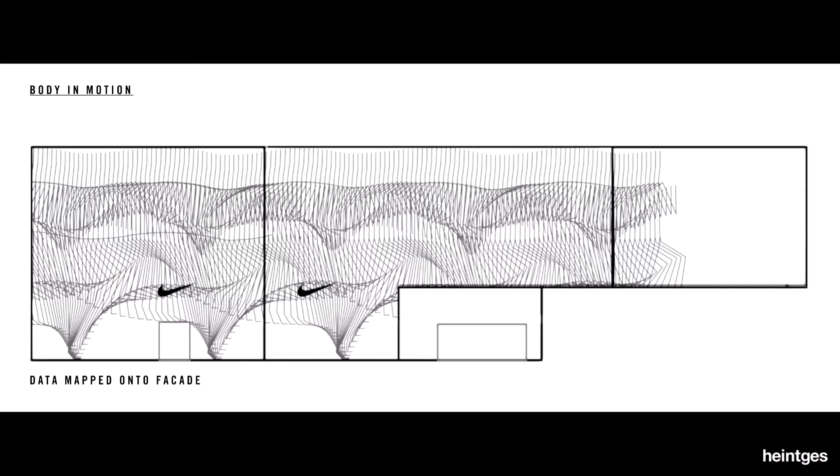The designers wanted the facade to be more dynamic than just a flat image. They wanted glass to provide transparency, limited and distorted transparency to the store experience within, but they wanted the facade to be activated. They aimed not to just represent, but to embody motion. The idea was how to do this with the glass. So we know that glass can be molded and shaped into many forms. There's lots of architectural examples of curved and textured glass that were looked to as precedents.

And from that developed Nike's intent. They wanted to create a lenticular view through the glass with constantly shifting reflections, refractions of light, a tight membrane vibrating with energy as people move around, through, and inside the facade.

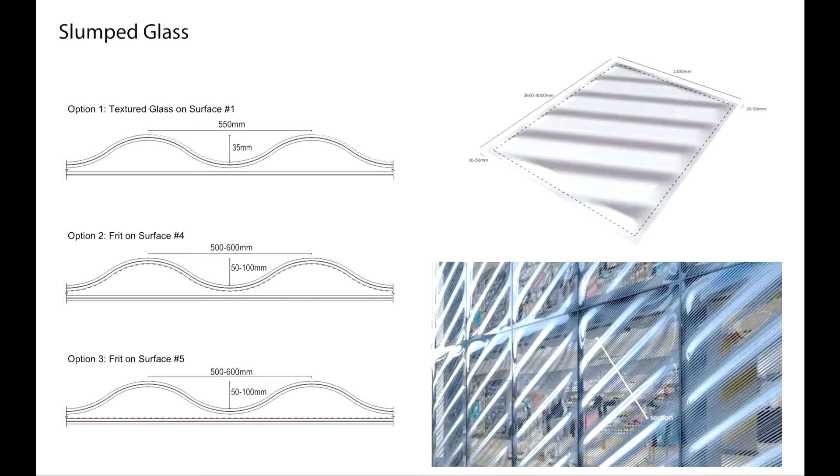So there were 2 scales of patterns on this facade. The double curved geometry of the slumped waves, which tapered to a flat perimeter, was discussed as the macro pattern. This was enhanced by a micro pattern of lines, providing a finer grain of texture on the surface of the facade. The inner light would be flat to allow for low-E coating, but also for the application of graphics behind in the future. And as this got started, the idea of translating this onto a facade in a building presented a number of challenges.

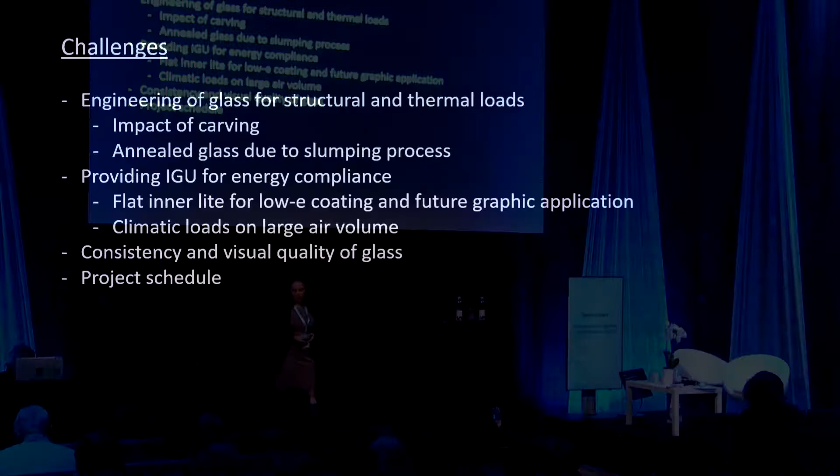So it wasn't a stretch to think that the glass could be physically made into this shape, but to implement it on a facade, to feel comfortable with the engineering and everything, and to have someone sign off on it was more of a challenge. Some of those challenges included lack of established rules for engineering glass with the surface disruptions, as well as the use of annealed glass necessary from the slumping process, which would be more vulnerable to breakage from thermal stresses.

The flat inner light expanded options for the low-E coating, and as mentioned, for graphic application, but it meant a larger volume of air between the lights, which would increase climatic loads, which I think I heard a couple other presentations talking about today. As the air expands and contracts throughout the year, that larger volume of air can create issues. In addition, there were the typical issues of consistency, visual quality of the glass. And then we had the schedule. So this all had to be accomplished on an accelerated retail project schedule.

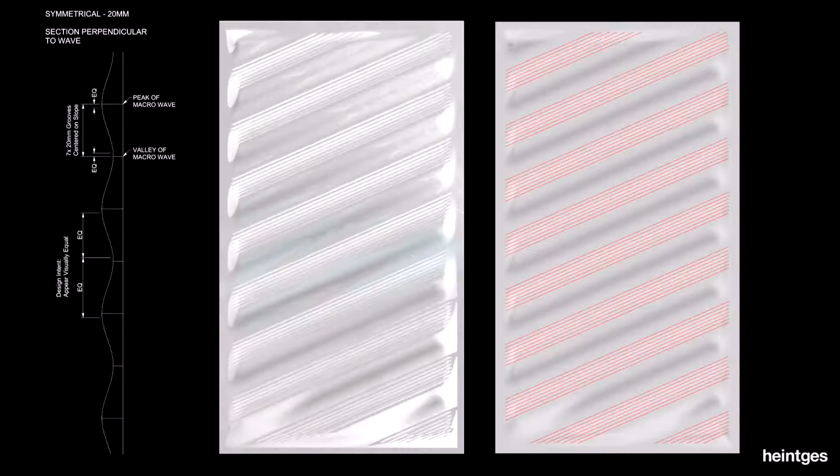So we got started. The engineering analysis started with geometry from the design team. See here. Heintges used that 3D geometry for preliminary engineering of the slumped glass, checking for stress and deflection to confirm the viability of the architectural design. We looked at different reductions in thickness, different assumptions for the areas where the glass was to be carved.

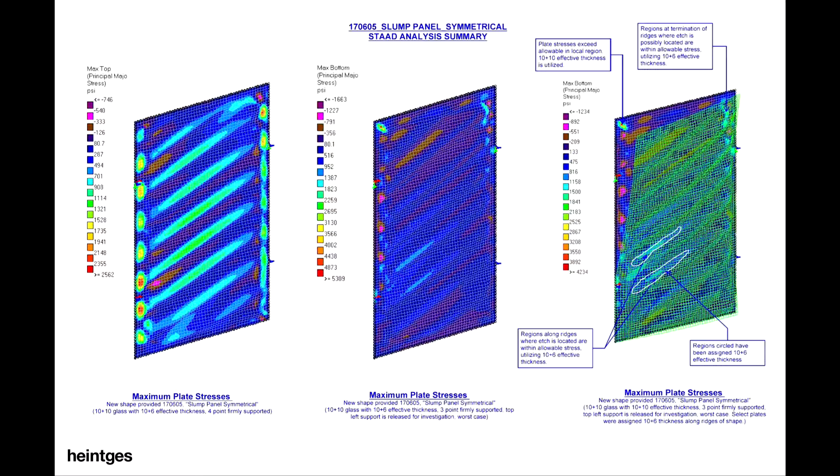We also looked at thermal stress on the glass, with the worst case being a hot differential temperature between the center and edge of the glass in the summer. And then evaluated as well the IGU performance under the climatic loads. We calculated equivalent thickness of monolithic glass that would have the same stiffness as this very stiff laminated outer light.

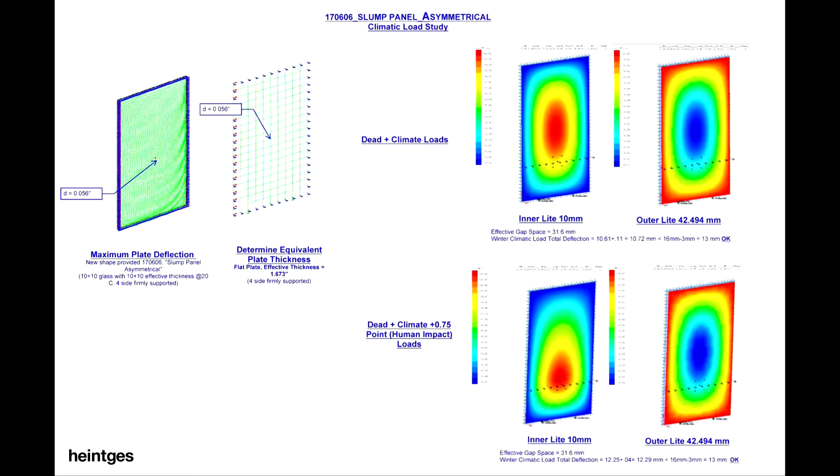Approximately 1.7 inches equivalent of glass was used to check the deflection under climatic loads of the inner light, which being much thinner would do most of the deflection. We wanted to make sure that the stress on the edge seal was okay, and also that the two lights wouldn't touch under any of the expected conditions, including when you incorporate all the glass tolerances.

So as these engineering analyses were continuing, once we showed feasibility, we knew with the schedule that it was important to bring on glass fabricators early. And so at this point, Cricursa was contracted to join the research and development, starting with a selection of samples to look at how to create the micro pattern and how the macro pattern could be joined with that to get the desired effect.

So Cricursa, in their factory in Barcelona, began working on a number of trials. This is a view of the micro pattern, which was created by carving shallow grooves on the #1 surface of the glass, carving and polishing with a CNC machine. And then this is one of the first photographs we saw of a small size sample of this first prototype where that carved glass was then gravity slumped on a mold to create the waves and come down to the flat border at the perimeter.

I think when this photo was sent, these initial samples were reviewed through photographs and conference calls. Everyone kind of let go of the breath they'd been holding and thought, okay, it can happen. We can make this project. It began to feel real, but of course there was a lot more to do.

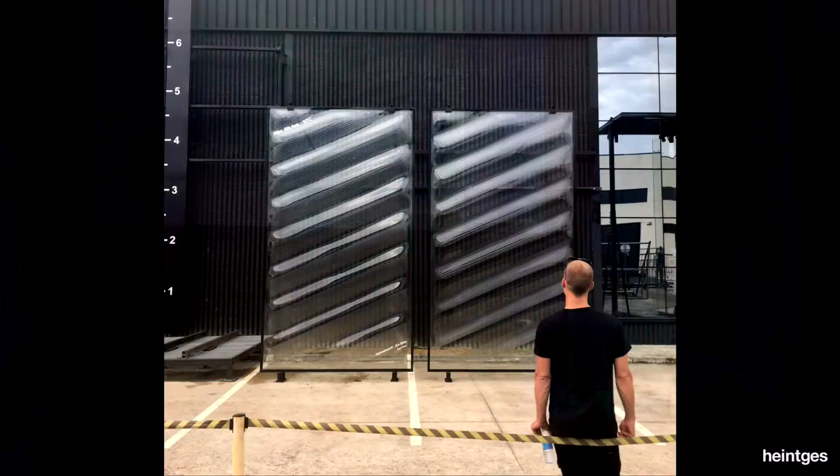And then we moved on to the next round of visual mock-ups, which was full-size, project-size IGUs that were reviewed at Cricursa's plant by the design team to make the final decisions about the pattern and location of the microtexture, as well as the slump shape. The outer light, at this point, we settled in on the glass makeup. It's 10 plus 10. The outer light is carved, as I mentioned, with about 1 millimeter deep grooves, and they were 20 millimeters wide. And then the inner light is heat strengthened with a low E coating on the #5 surface.

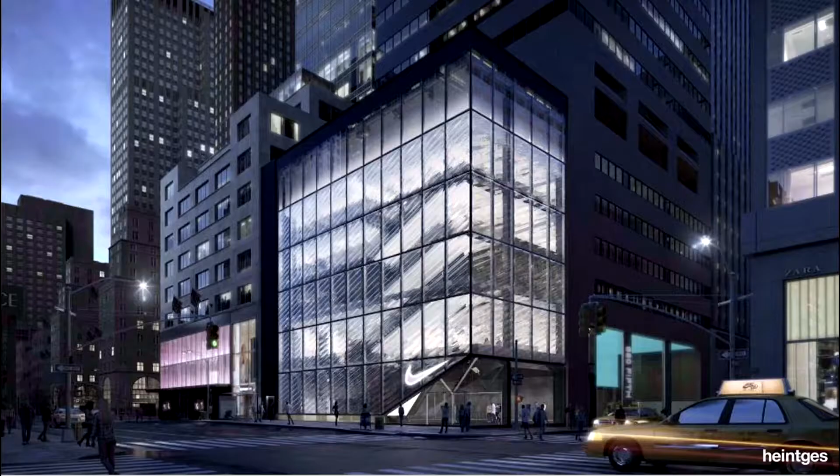From these samples, the final geometry of the glass was determined. Some of this came from the design team's refinements, and some of it came from the fabrication requirements and limitations. So the adjustments in the width of the flat perimeter band, where the edge seal would lie, as well as the height of the slumped waves. And these revisions were then taken back into the analysis and checked again to make sure that the structural acceptability of the glass form was okay. It was acceptable.

So at this point, there was actually a decision made to make uniform the glass sizes, largely for cost and to limit the number of molds required for the glass. You can see here there are 4 atypical lights right there. The rest of them are all typical. But the other thing this did was actually make the facade stand separate from the structure behind, and it divorced the lines of the facade grid from the floor levels behind.

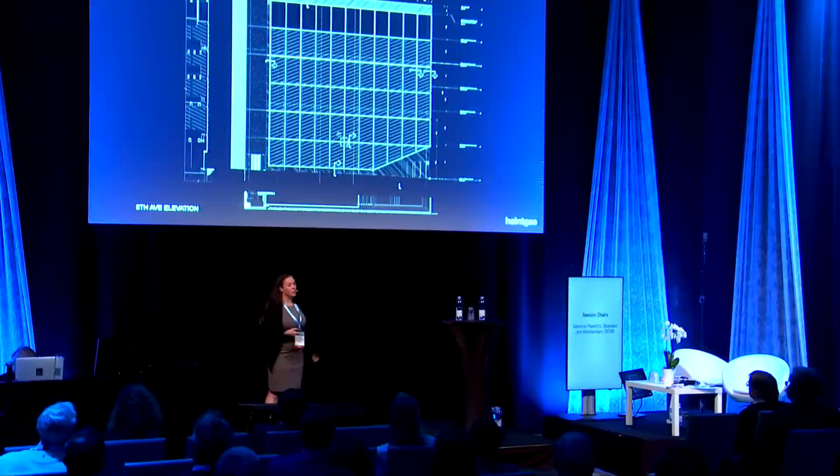It was at this point, with this design finalized, CLA was brought on as the facade contractor, and along with Larson Engineering, they were the final engineers for the full facade system. So here, in this image of the facade, the structure was steel framing, mullions and transoms that were hung from the roof up here. Coming down, they were connected laterally at the 1st, 2nd, 3rd, and 5th floors.

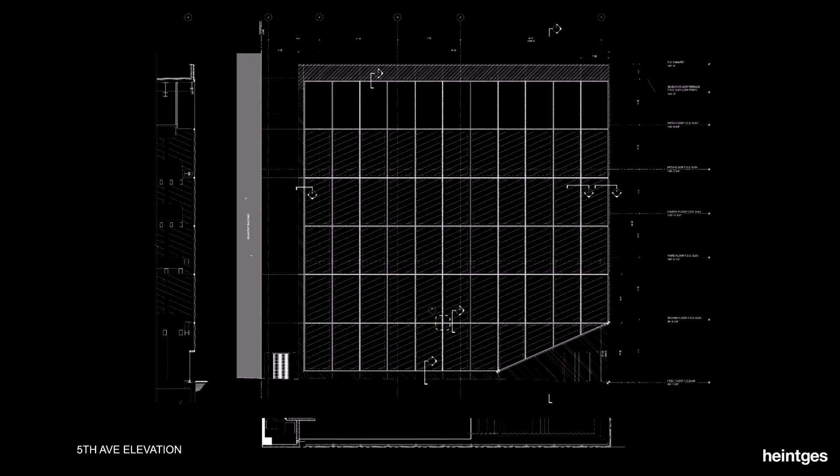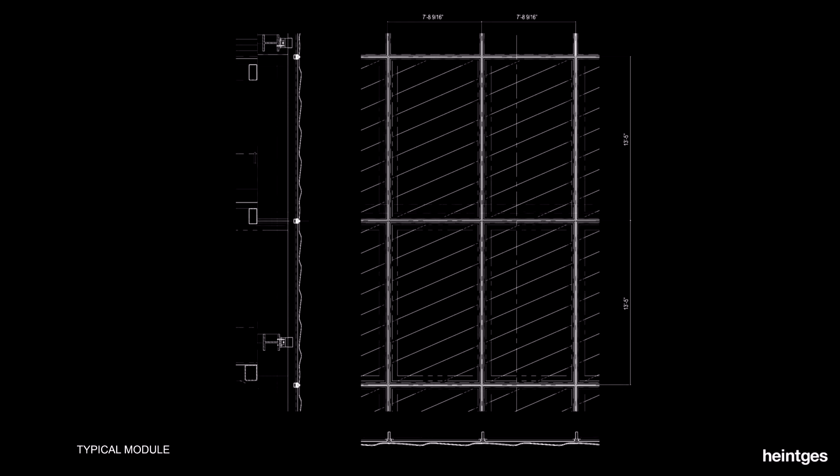And there's the entranceway, as I mentioned before, which has the 4 unique lights of glass. Here you can see the glass units are about 2.4 by 4.1 meters. And the wave pattern angle is 23.5 degrees, which is the same angle as the Nike swoosh. And also, the spacing was designed to allow that angle and to continue the lines across the entire facade between panels.

The glass was pre-glazed. You can see here the design, pretty simple, pre-glazed to aluminum glazing adapters, and then with a toggle system designed by CLA attached back to the steel framing.

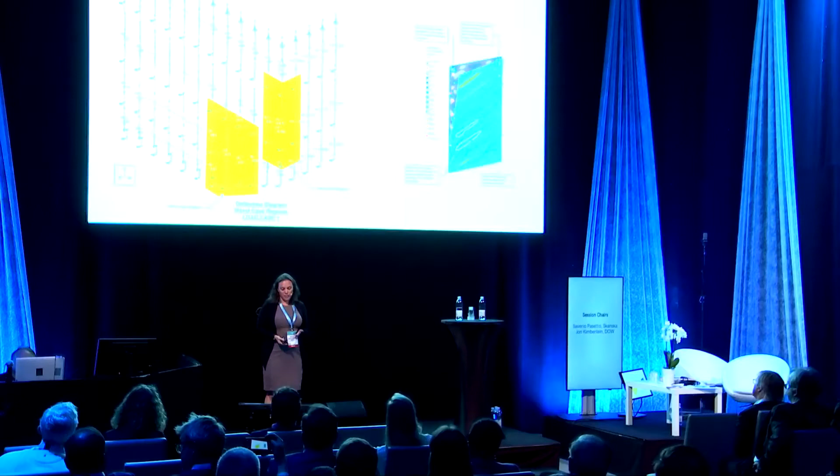And this development of the facade system provided information that was fed back into the glass analysis. So here is a deflection analysis of the steel framing. And you can see highlighted in yellow a couple locations where, due to the locations possible for anchoring back to building structure, we had differential deflection.

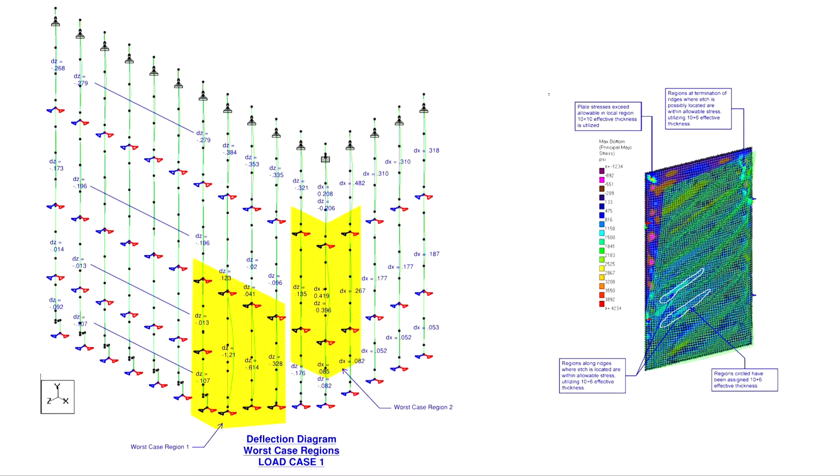And with the glass, we needed to make sure to balance the stiffness of the mullions with the inherent stiffness of this glass, and to make sure that the glass could accommodate the differential deflection of the framing without excessive stresses. You can see some of the analysis here. We had made assumptions, particularly about the etching in the glass during the engineering. And to validate some of that, early on there was material testing done.

4-point bending, EN 1288-3. 360 by 1100 millimeter samples with smooth ground edges. And they were all fired flat in the slumping kiln with the same time, temperature, duration that was expected for the final project, for the laminated glass. And the idea was to test and see how it related to typical flat glass.

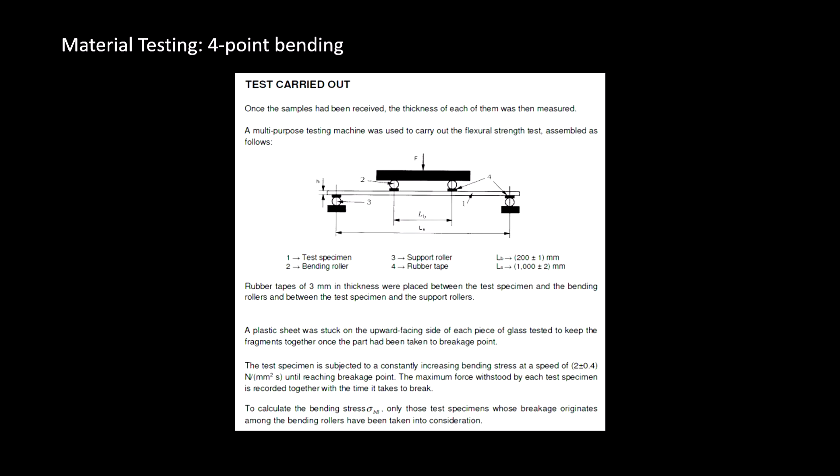And as expected, the carved glass was slightly weakened by the carving, a larger reduction in strength when the carved surface was in tension, but it still performed structurally. And this was encouraging. I think the assumptions that were made during engineering proved to be pretty accurate. But at the same time, in order to feel comfortable, further testing of actual project glass was required.

So 5 full-size pieces of just the outer light, the laminated 10+10 carved slumped outer light, were structurally glazed to the aluminum glazing adapters, and attached to, as you can see here, a test chamber at seele's facility in Germany. It was tested for structural and for thermal loading.

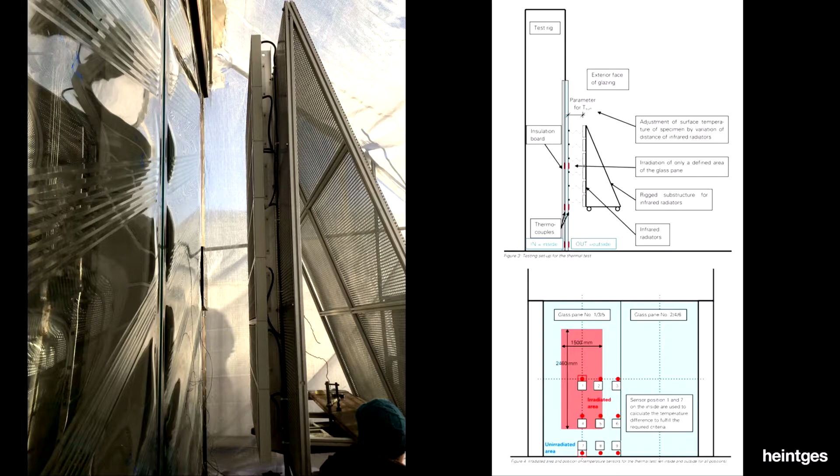This is the test setup for a thermal stress test, where a heat source was put in the middle of the glass, looking at the temperature differential across the glass. Based on calculations, the expected differential between edge and center of glass was about 20 degrees Celsius. The idea was to try to test to 2 times that, and then also to try to test to breakage.

However, even achieving 120 degree differential between the cold edge and the warm center, which was as high as the equipment could get, there was no breakage. So that gave everyone another level of comfort with the thermal stress. And then also in that chamber, there was typical structural loading. So design and 2 times design, pressure and suction were tested.

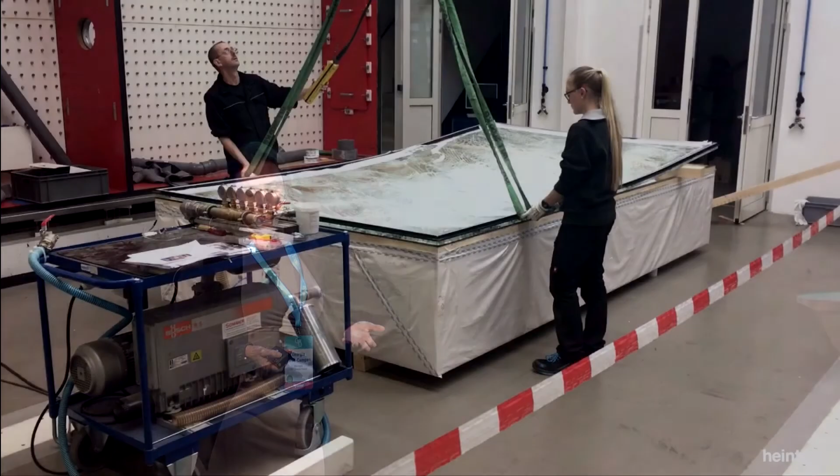The deflections measured checked out with what the models showed, about 6 millimeters of deflection under design wind suction. But we wanted to test and understand the ultimate strength of these and test 5 lights to breakage. The load to do that was greater than could be handled by the chamber. So seele created this vacuum box in their factory. The light was sealed to it, and air pulled on it.

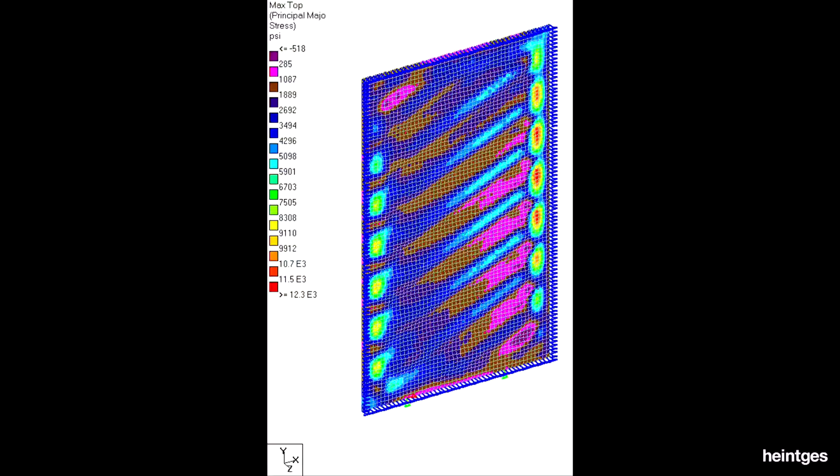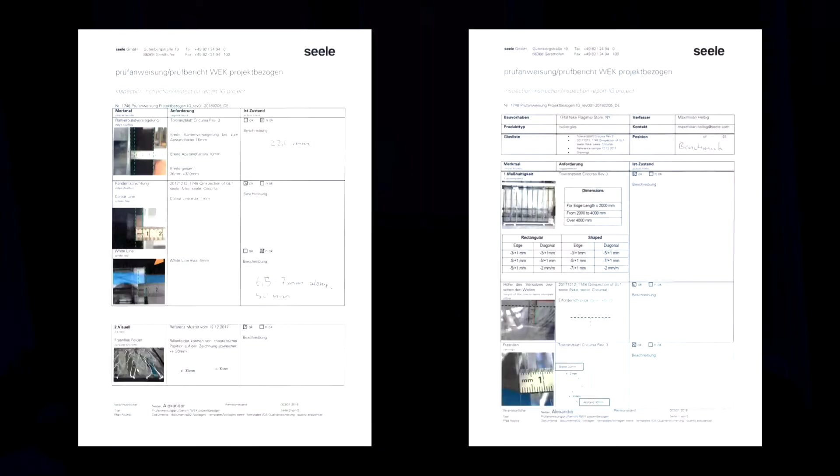An assembled IGU was also put in seele's facility and reviewed by the design and construction team to establish acceptable criteria for the quality control of the production glass. There was a QC inspection checklist established that seele used to check each completed IGU. The issue of the climatic loads and the airspace came up again here. On one of the early samples, there was damage caused when the inner and outer lights had touched, the airspace being too narrow in the middle.

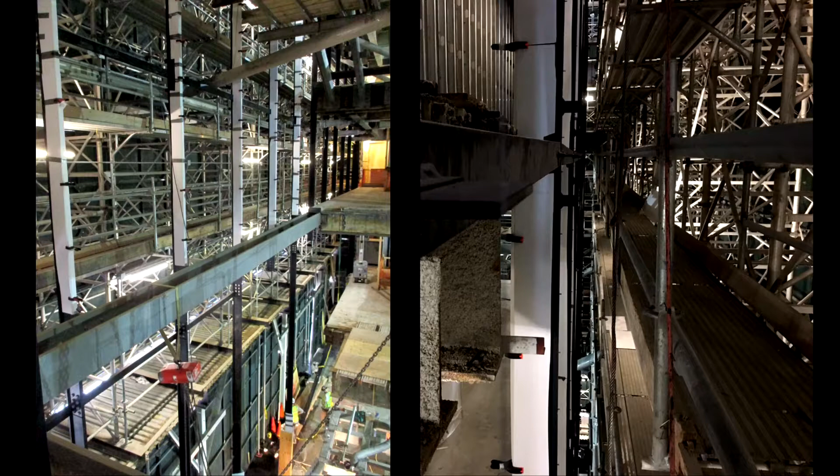Once the demolition of the existing wall was done, you can see the steel framing was installed, anchors, and construction access was done either from the inside, which you can see with the large atrium, though pretty soon there was not much access from the inside, and from the scaffold. You can see on the right here a very narrow gap between the scaffold and the mullions, and it was in that space that the glass units were lifted into place and installed.

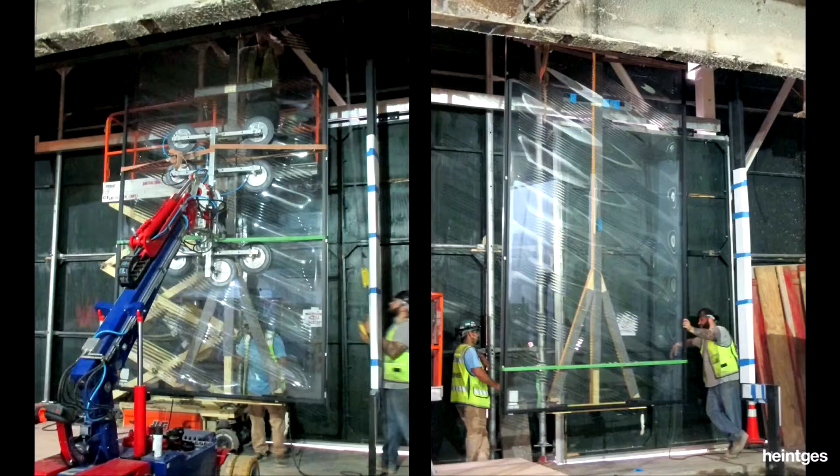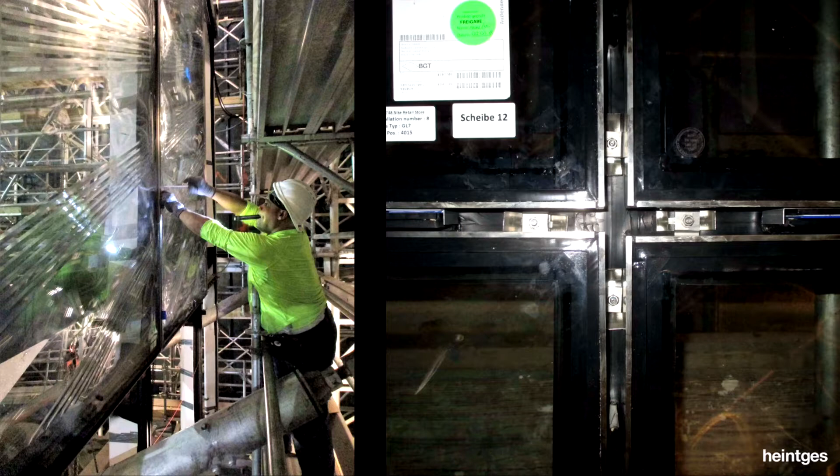So they used a manipulator to lift the glass, position it vertically, and then used a frame that was suspended from a monorail at the roof to lift the units up into position, to put them in place, and then they were attached to the steel frame with toggles and sitting on the dead load chairs on the horizontal transoms. Final adjustments were made later as all of the weight from the glass, the final settling of the framing. Once almost all of the glass units were installed, the scaffold was taken down.

And here, the completed store. This is November of 2018. It opened last year. The innovative enclosure was successful. The translation of the brand identity into a unique facade, embodying motion, performance, and innovation.

The macro and micro textures create shifting reflections, refractions, as the glass exists both as a lens and as a surface. The perception of the facade materiality, color, and transparency change with the viewing angle, the weather, the sky conditions. And the facade is experienced very differently during the day than it is at night.

During the day, the view from the exterior emphasizes the slumped glass shapes with the reflections of the light. From the inside, the glass appears much flatter in that light, but the carving is much more apparent. I think this image shows the motion of the city outside, expressed through the distortion and the elongations of the transmitted image. A corner view here shows similar effects, but then you look at the same thing at night, and the effects change.

Great presentation, Georgia. Are there any questions from the audience? Great presentation, great building. You mentioned a firm in Barcelona. Could you explain a little bit further where the materials were being produced? Sure. Cricursa is the glass fabricator in Barcelona. So they did the slumped glass, the carving and slump glazing there. The steel was by Seele, German facade contractor. I think the steel was fabricated actually in Poland on this project.

Did you ever consider producing the material in the U.S., sort of in order to support the idea of sustainability? I think on this project with the glass in particular, it was really a matter of finding somebody who could work with us to do the design and the research and development, because it was really trying to develop a new product, essentially. And we didn't find that in the U.S. on this.

How did you come up with the firm in Barcelona? Had you worked with them before? We had, yeah. We spoke to several curved glass providers in Europe and some in the U.S. as well. We did initial discussions and even a couple initial samples with a couple firms. But as we saw, they kind of came through with the glass, and they have a long history of doing this kind of product.